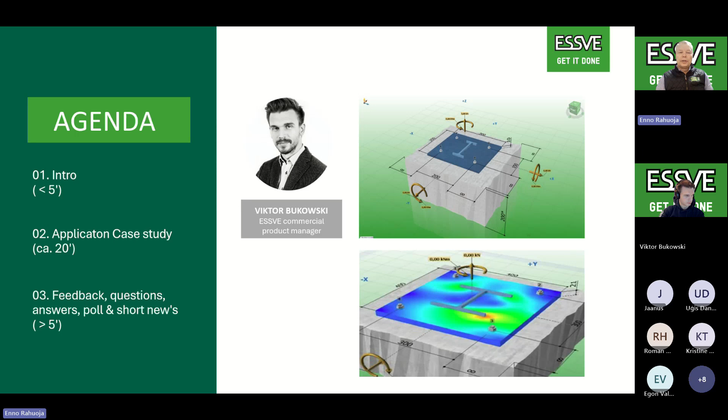Super good. All right. Today is a concrete day. And as promised, we will talk about different concrete fasteners. And I will do a very light introduction. Today's main speaker is Viktor. He's our commercial product manager. And the agenda is like usual. We do a light intro for those who are new, and then we go forward with our, let's say, case study.

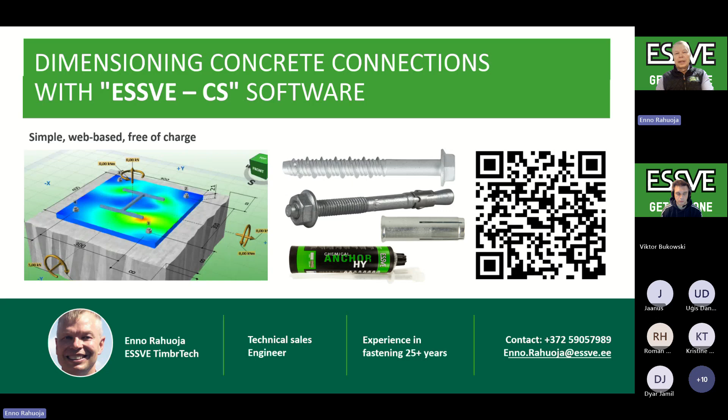So I will start by sharing my screen and start presenting. Do you see the correct green slide with the product? I see the range of product now. Yes, so we will do a brief introduction to the products that can be found in the software, and then we'll talk a bit about the software afterwards.

So first of all, we have the classic wedge anchors there on the left side, and these have existed for a very long time in the market, primarily intended to fasten steel to concrete, I would say, and we offer them in carbon steel and in stainless version, and in a lot of lengths and dimensions.

Next, concrete screws we think are perhaps a bit more modern product, and here we talk about, of course, concrete screws that don't need a wall plug. They can be installed directly into the concrete after drilling, of course, and it's very easy to install compared to all other concrete fasteners, I would say. So easy installation and also easy to remove, which is good from a sustainability point of view in terms of when the building will no longer be used in the future.

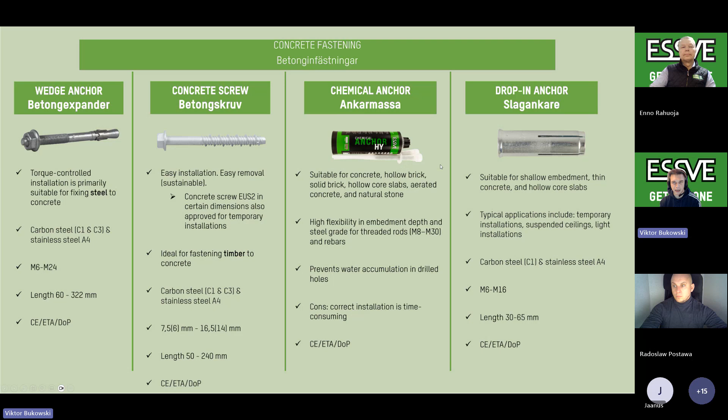And a service we offer is, of course, pull-out testing. A lot of the time, especially when you do a test in tension, it's not the steel that will fail, but it will be the base material that is the weakest part of the fastening, so to say. So here you can actually check what will be the capacity of the anchor based on that.

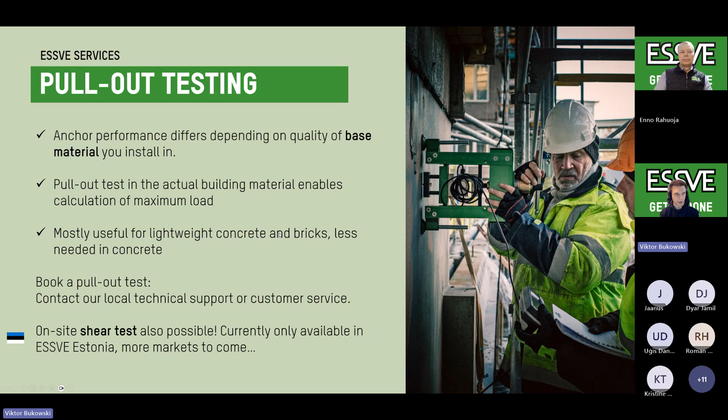I would say it's mostly useful in those lightweight concrete or bricks, and less useful in pure concrete. But it is a service we offer locally, so contact customer service. And also shear testing is something we have started to offer, so far only in the Estonian market, but this will become available in other markets in the future, if that's of interest.

Then another product I want to mention, it's not in our software, but it's a very good product specifically for lightweight concrete. So this is a product that we actually do a lot of pull-out testing with, and the capacity is very good in solid bricks or lightweight concrete. It becomes very similar to the capacity that chemical mortars have, because of course, again, it's the base material that is the weakest, not the steel in the screw.

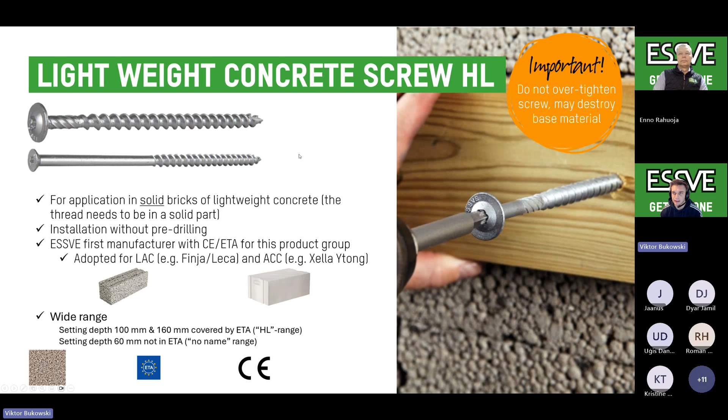And this is also covered by a CE marking and an ETA for the long setting depth, so 100 millimeters and 160 millimeters is required for that. And then a little bit about the concrete screw that I already mentioned. It has a wide range of applications, of course, permanent installations in cracked, non-cracked concrete, also in hollow core slabs that we show in the picture here below. And there you actually want to install it in the hole, so you don't hit the rebar on the sides there, the black dots.

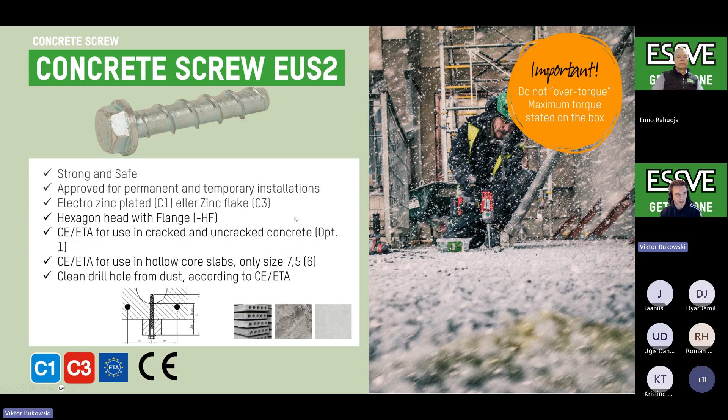And yeah, we'll talk a bit more about this product when we go into the software, so to say. But we also have this reusability, what I mentioned with the sleeve, that you can test the thread, see if it's still usable, and then you can use it again for temporary installations, such as those safety rails and bracings, for instance, if you're setting up walls of the building.

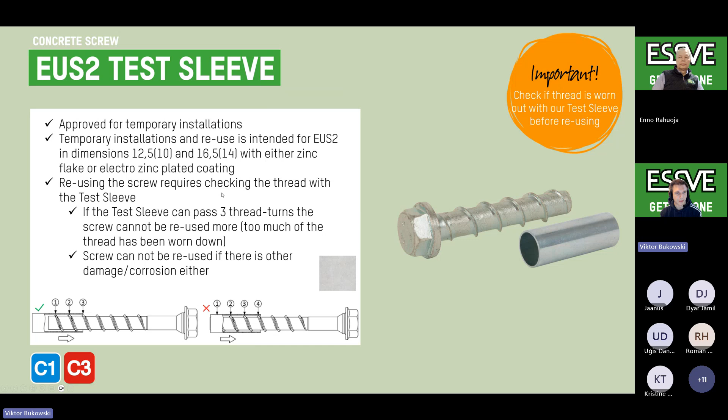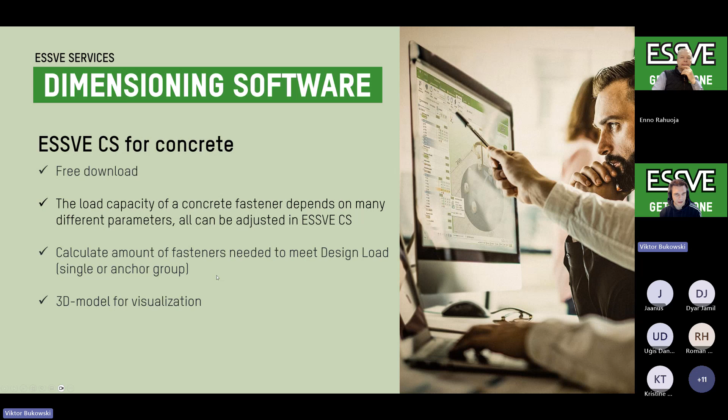So now we'll start going in a bit on the software. It's a free download, so it's a desktop software, but it's very, I would say, intuitive, and it's easy to use. I will show that. You always get a confirmation from the software. Is this working or is it not working? And if it's not working, then what's the reason? And I will show that very quickly, so I will not talk more here.

I think the easiest way to find the software is actually to click through on our website, and you want to go to our concrete page for engineers, for designers. That's available on our local sites here. And the design in this software follows the Eurocode. This is the first generation Eurocode, but it was actually published quite late. It was published in 2018, and it's the design of fastenings for use in concrete.

And this Eurocode is very similar to the previous methods that were available for evaluation. That was the ETAG methods and various EOTA documents. And then for a while, we also had the CEN/TS, technical specifications that were very similar to the Eurocode. Small differences that are described in the standard for those that are curious.

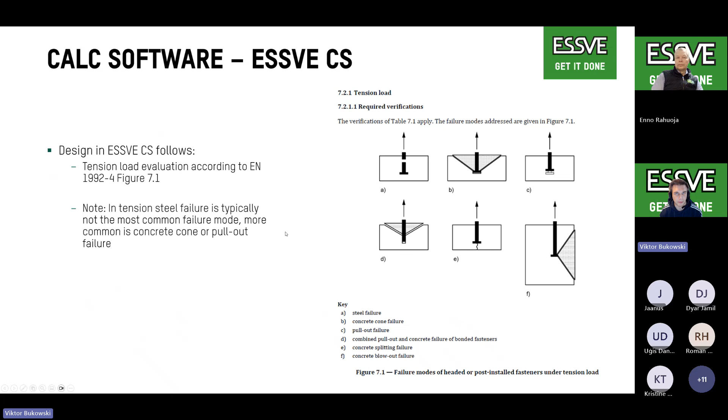And then another special case is this blowout, the F. That's also special geometric requirements that basically have to be valid for that to happen. So it's not so common either. And then on the shear side, here actually steel is more common as a failure mode, and also if it's installed close to an edge, it will definitely be a concrete edge failure. So that would be D.

And it can be important to mention here that when you have a shear load, it counts from the, what do you call it? Like the flush with the concrete surface. So if you have the force acting higher up on the anchor, you actually get a bending moment on the anchor itself, and that reduces the capacity quite a lot. And this can also be accounted for in ESSVE CS, but in special situations. So the most common situation is that you actually have the shear load on the plate.

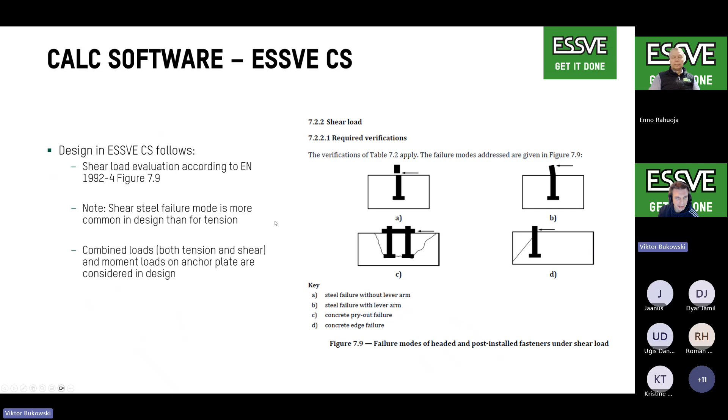I will jump forward. Another important thing to keep in mind when you design is the cracked and not cracked concrete. And this is described also in the Eurocode, like how do you assess if the concrete can be considered uncracked. But the safe side is, of course, to assume that it's cracked, and with this evaluation method that's in the Eurocode, you need to have high compression basically, and then it can be considered uncracked. But if you're uncertain, it is always conservative to assume that it is cracked and that the concrete is in tension.

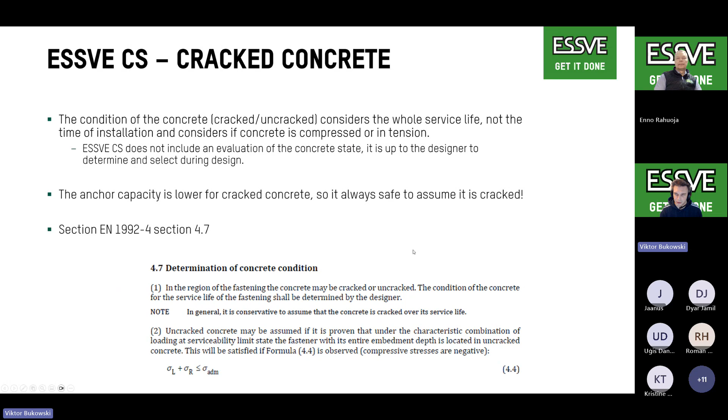And this, as the Eurocode points out, considers the full service life of the fastening and the construction, not what it looks like when you install the anchor. Is the zone in this building in tension? That's the important question that you need to answer. Unfortunately, here ESSVE CS doesn't help you in any way to determine this. It's just a design option that you have to consider in the software, if it's cracked or not cracked.

And then some common questions that we get, like why can't my connection look like this in the software? That is because the software follows the Eurocode very closely here. These are the patterns, so to say, that the Eurocode allows, so that's what we can do in the software. And does the software support timber to concrete connections? No, not fully, unfortunately.

The Eurocode is written very much that it's a steel plate that helps distributing the forces down to the anchors, and that the anchors are loaded very symmetrically, or they have a combined effect thanks to the steel plate. So if you want to do a design for timber, you have to check the timber side, so to say, of the fastener, with head pull through, for instance, or shear on the timber side of the fastener.

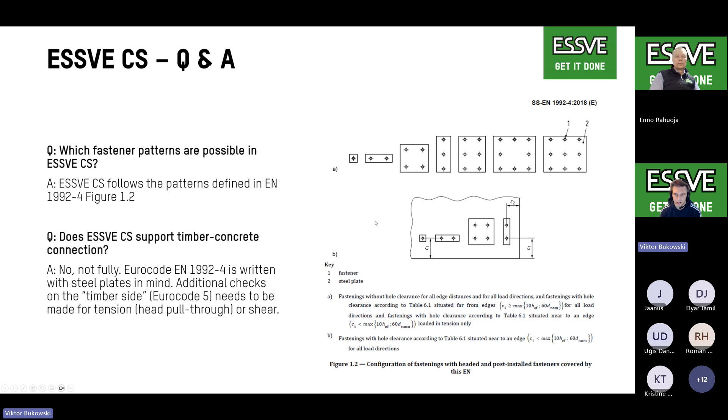And then just a quick mention that load tables are of course nice, but they have their limitations, and we will look at some of those limitations today. In almost all load tables, not just the ones from ESSVE, you don't consider edge and spacing effects. So it's just a single anchor in an infinite concrete slab in a way. And it's usually also a pure tension load or a pure shear load, so not a combined loading. If you have both a little bit of tension and a little bit of shear, that's not directly accounted for in the load tables.

And then for our concrete screw that I mentioned, we have this tension and shear. We actually also have shear when you put it at the smallest edge distance. So there you can see that you have a very large drop in the capacity if you install it very close to the edge. And we also have load tables for hollow core slabs.

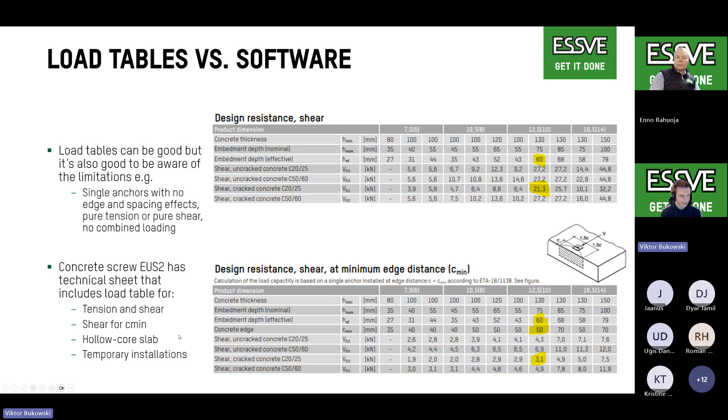These are not in the software, but they're kind of easy to evaluate, since you're limited in how to install it, and then just follow the spacing distances, and you're good to go. So the software is more for when you have a plate that you want to design properly, I would say. Same with temporary installations. You just have a capacity and follow the spacings, and it's fine, so to say.

So now we'll jump out of the presentation and go into the software. When you start the software, it will look perhaps more like this. The first thing that I like to check is what evaluation method am I using. Now I'm using this Eurocode method. And another important thing is the base material, what base material am I using. And here I'm using cracked, so that's good because that's on the safe side.

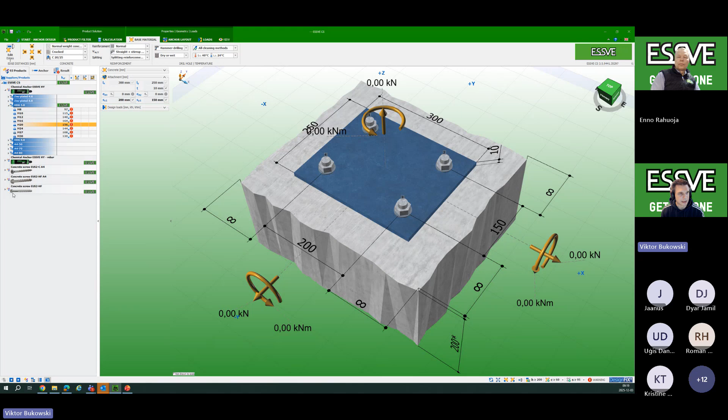And we will look at a concrete screw, and we will look at this one. As you can see, we have 4 anchors currently, but we will start by looking at a single anchor. So, oops, we'll change here that we have a single anchor.

And we'll start by applying a shear load. We're doing 21. And then you can see here I added 21, and then you actually see on the arrow, like now the direction of the force is going here from left to right. If you want, you can click the arrow. So now it goes the other direction.

You can also do this directly in the input. It's a bit more difficult because here you have to consider the symbol. So if it's a negative and plus, you can flip the direction like this, but we want it pointing this way. And here you can also see that we have infinite edges in all directions. So now what happens? We have a capacity of 21. That's basically full capacity. We can click on the results here, like why is that happening?

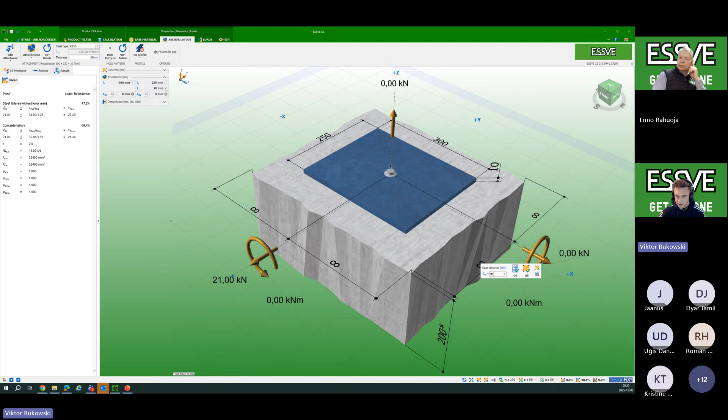Okay, we have a concrete failure. So that means it's not a steel failure, it's a pry-out failure. And what would happen if we install it closer to the edge? We can try to do 40. And then we have to look, we can see here already, like 40 is too little. We have to increase it to 50. That's actually the minimum amount for this anchor.

Okay, 50. Okay, but we still have some error. The attachment protrudes from the concrete. Okay, so then we have to reduce the size of this. And now it works. So we have a much higher utilization here, 670%. So the capacity is only 3.1 kilonewton, and that was what I showed in the load table. So it's reduced dramatically for this shear load.

We could also apply a tension load, but how much can we actually apply when we're utilizing so much in shear? Well, we can perhaps only add 3 kilonewton, and then we can see. No, of course, this will not work because we have the edge distance here. We'll remove this edge distance, so we go back to infinite.

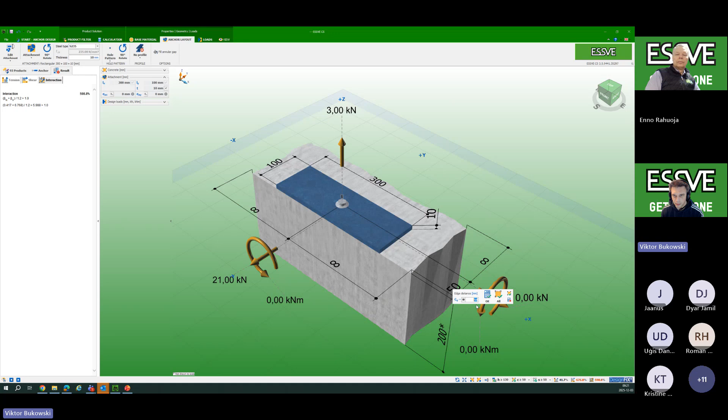And then it actually doesn't work because the interaction here, we're at, you can see it here, 105%, so it's a little bit too much. You can also see it here. Here's the tension, here's the shear, and here's the combined. But if we lower this to 2, yeah, that works. So now we're at 97.

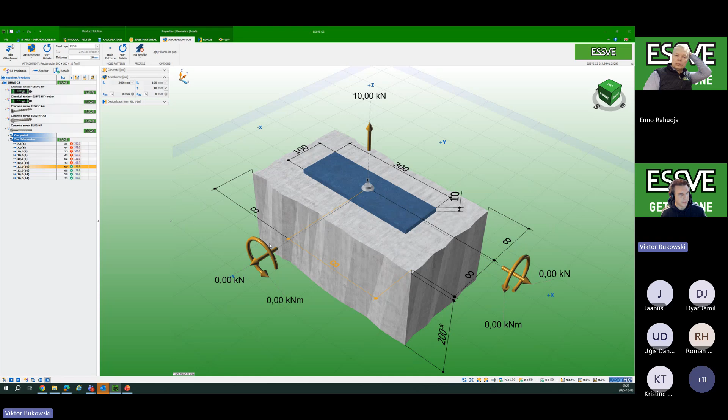And if we, of course, remove the shear, now we can utilize a lot more up here. Here we're almost doing 20%. So 10 will be the actual maximum that we have in tension. So this is what you can't really get directly from the load tables. And what else can we look at? What happens when we have 2 anchors, for instance?

Then of course the capacity should be doubled, and in this case we can increase it here. Of course it's fine. So why is that? Well, again, we don't have a steel failure. We're not even close to having a steel failure. It's a concrete failure. So this means it's the concrete cone that is the failure. So both of these have a concrete cone that's governing the failure.

But if we put them much closer together, how close can we put them? Well, can we put them 30? That's very close. That will probably not work. No, that doesn't work. But we can actually put them at 50. Okay, so then it's still a concrete cone, but this concrete cone is now shared between the anchors. So it's like quite small for both anchors. So the capacity of 2 anchors is not doubled anymore.

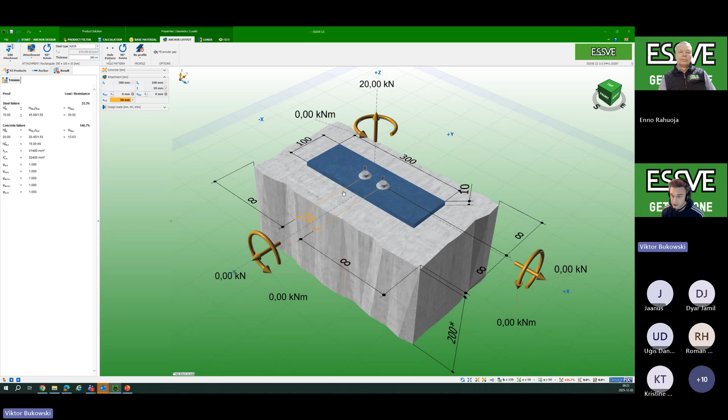So if you remember from the single anchor, it's approximately 10, but now 2 anchors only have 13, almost 14 kilonewtons in capacity. And that's simply because they're installed so close together. So how close can they actually be installed to have full capacity? Well, I happen to know that it's 180. So I will input that here, and then you see I have the full 20.

How can I know that it's 180? That's maybe not so easy to remember, but the setting depth of the anchor is 60. And then if it's 3 times that value, then that's the full capacity of the concrete cone, so to say. So then we have two cones actually. So the full concrete cone is available for both anchors.

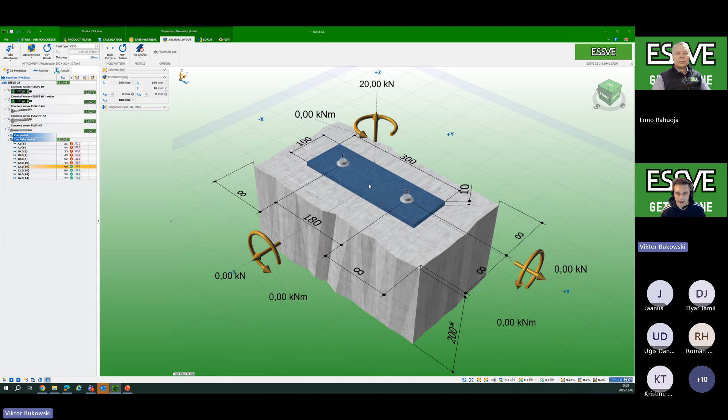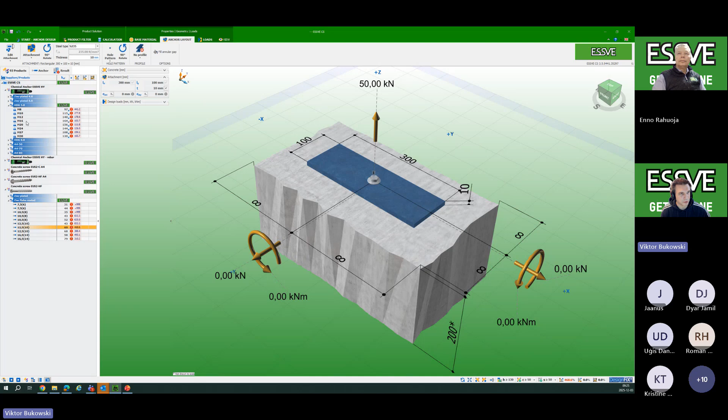But if we go to the chemical anchor, we have various different types of steel grade here, but we can try hot dip galvanized 5.8. Will it work? If we pick the M16, for instance, or M20, it doesn't seem to work. So why doesn't it? Like here, the tension load is 111.

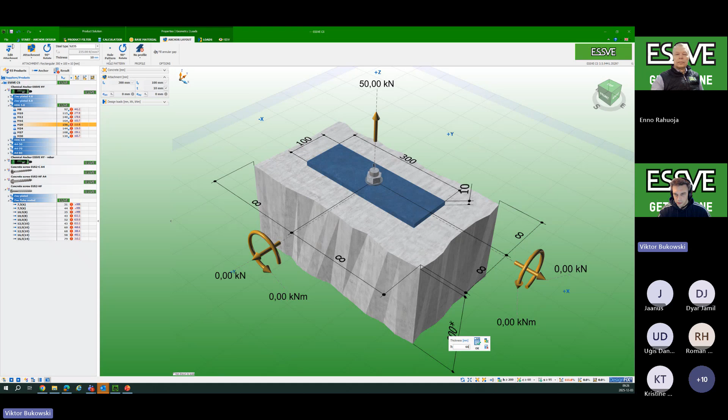So what's the failure? It's not the steel, so it's concrete, but we know that this anchor, we could put it deeper than 150. So what's limiting us? Well, in this case, it's the actual thickness of the slab. So if we increase the thickness, and then we have to click, oops, we could have tried this in a different way also, but sorry. Why is this not going away?

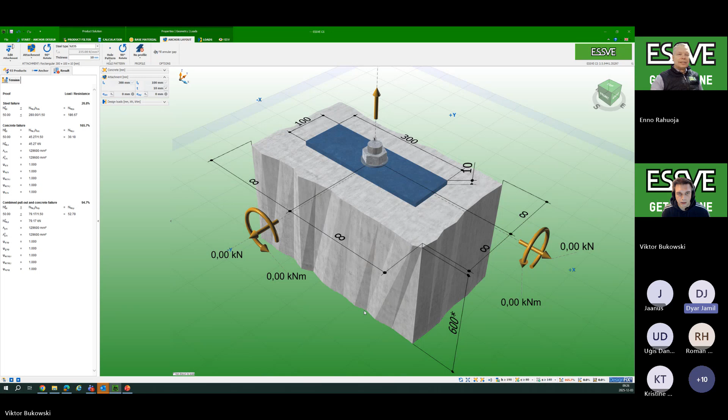Seems to have got a bit stuck. Did we? Here you have raised a hand there. Yeah, I think if you reduce the load, Viktor, because 50 kilonewton is too high for one. Yeah, I know what you mean, but maybe it is too high. It's a bit weird that it doesn't show. Now it works. Yeah, but it should have shown the error. Okay, but it works with 40.

What I wanted to show was that it increases the setting depth. Now it has become very fixed, so it doesn't increase it, because we have the possibility to put it at 400, and now we only have 50 capacity. So then we could do the 50. So that should update. I don't know why it crashed a bit here. Maybe I need to restart the software, but it should be more flexible than it was in this little demo. Now, no, it's still locked. Okay, but that's basically all I wanted to show.

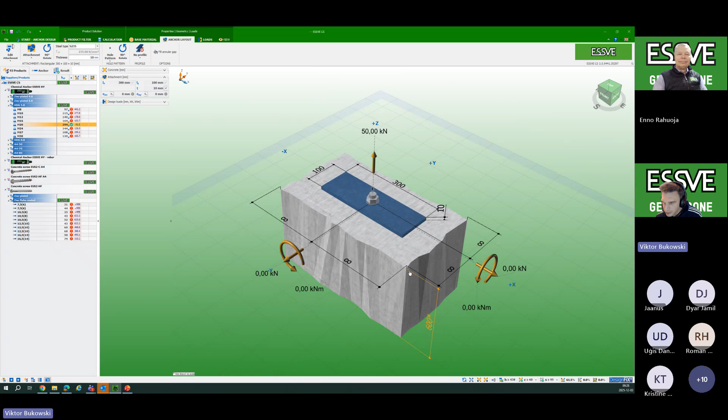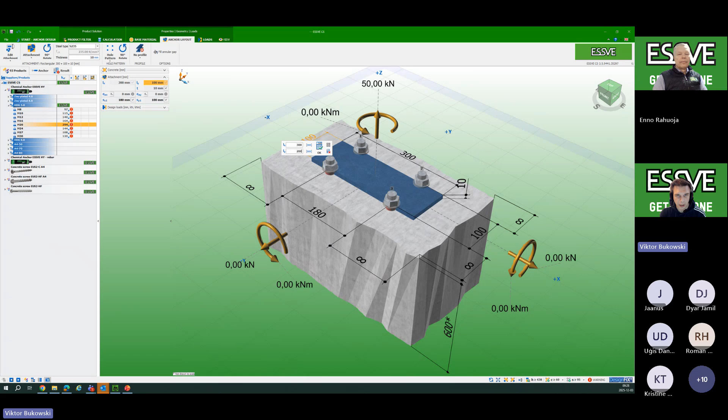We actually have a little bit of time left, so we can do one more thing. So we jump back to 4 anchors. We increase the spacing here to, oh no, not 400, 100 maybe is fine. Then we have to make the plate bigger. Oops. 200. We'll remove this, and we'll add a bending moment instead.

So then this bending moment has to be taken by a force couple. So 2 of the fasteners are being pulled, and then the plate is being pushed on the other side. If you, oh no, okay. Thought we would be able to. I will need to restart my software. Something is not working as intended with the chemical anchors, unfortunately.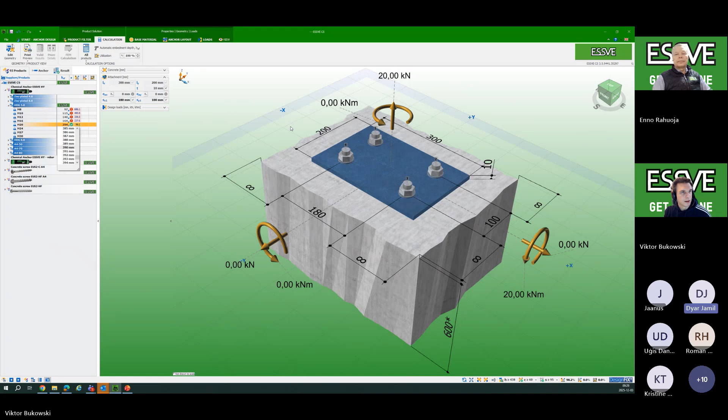Okay, but that's all for the demo. And so if there's any questions, you're allowed to ask them. Dyar is raising his hand. Yes, you can add to that, because you have the ability to check the steel plate too if you click on it. Yeah, I know that's what I wanted to show, but I think I need to restart this. It's not cooperating completely.

Are you planning to show another opportunity, or are we close to the time as well? We're close to the time. I can, if I quickly manage to. I think it's because I removed the profile. Actually, I think that was the reason.

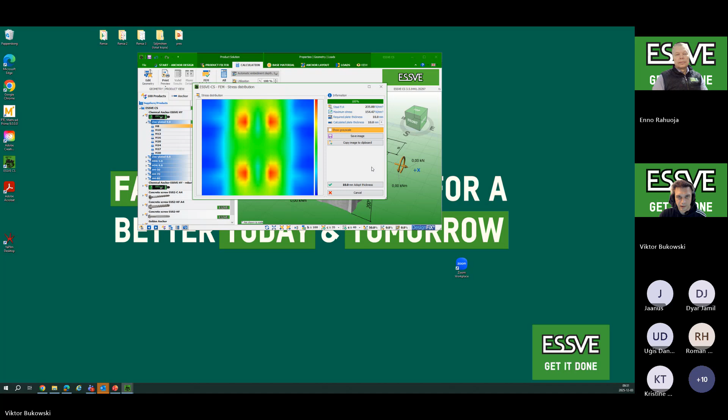But now we can do this simple finite element calculation to see if the load applied needs a thicker plate. Now it works with a 10mm plate, but we could have, if we only had 2mm, for instance, it tells us to adopt a 10.8mm thickness. So that was just it. So this is also available as a feature in the software. But now the demo is complete.